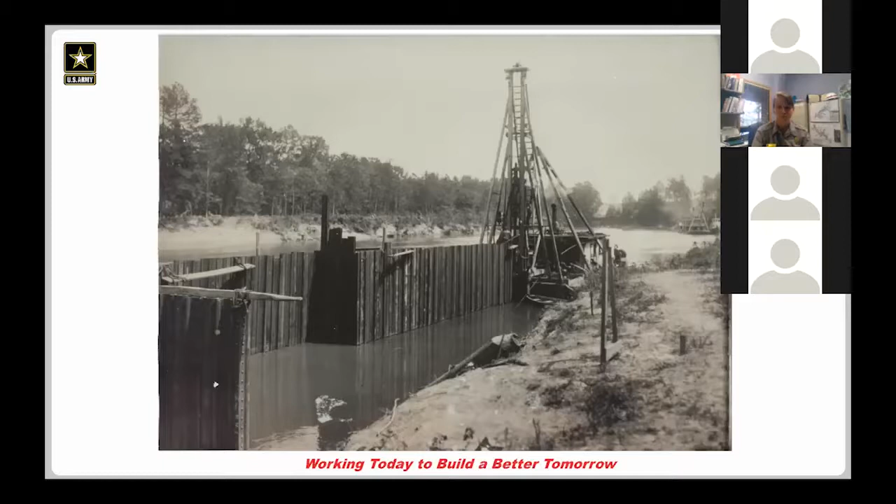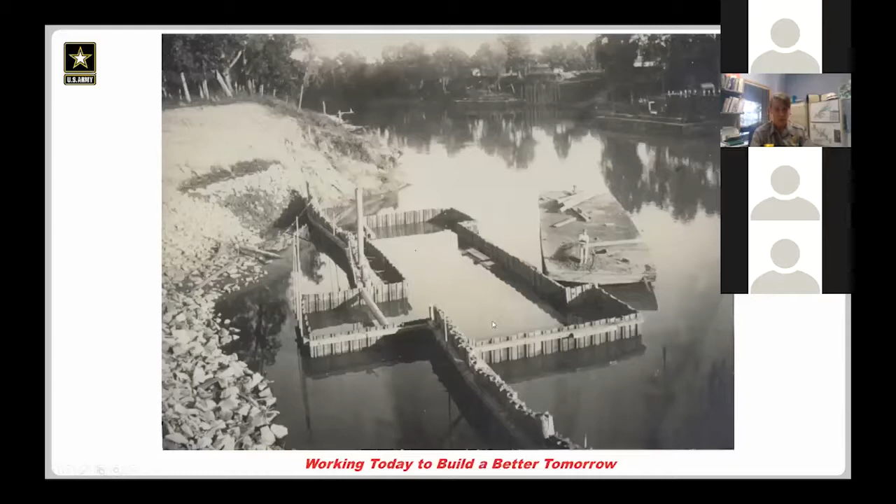This is a successful coffer dam. So as you guys can see, this interior portion, now that it's kind of fenced off with these sheet piles, would be pumped out, and then we would work and pour concrete in the dry in here. So eventually things worked out. This is a completed coffer dam. And once those completed coffer dams are put in, they would pour concrete and continue on with construction.

This is a really, really neat photo, I think. And some of the things I want you guys to take note of here. So this is the interior of our lock chamber. So this is where a boat or barge would be locked through. Typically, this is going to be filled with water. So it's a very unique perspective here, as if we were standing on top of a lock wall. This was actually a little later on; this was not during construction, this was during a modification, but it's a great picture I wanted to show anyway.

And you guys can see there's a person bent over here. So a little bit of scale, a guy standing here. These are what we call our miter gates. There's 4 of them, 2 on either end. And those are what literally swing open and then close to let boats through. At the bottom of each miter gate, there's a series of openings, and they have valve covers on them that flip up and down that are controlled from the top. And those are what we call our fill valves. So that's how we fill or empty the chamber to equalize the pressure.

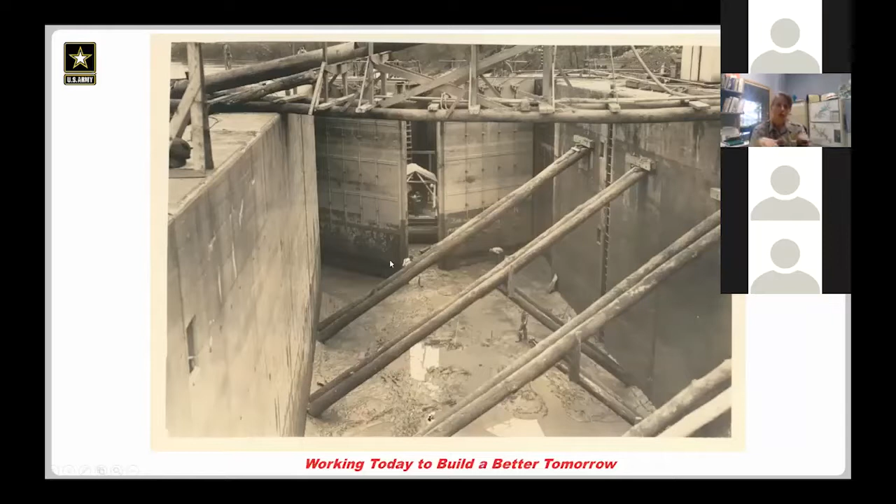So if we want a boat to come in and be locked upstream, we would lower the level of water in the chamber, open those lower gates, let the boat in, shut the lower gates, and then we would open some of these valves at the top end to let the water level rise and fill up to whatever the river height of upstream is. Once that's equalized between upstream and within the chamber, we would open those miter gates up top and let the boat out. Very simple process, really only takes about 30 minutes or so, but just still an engineering marvel to my mind, especially when we consider the time frame that these were built in.

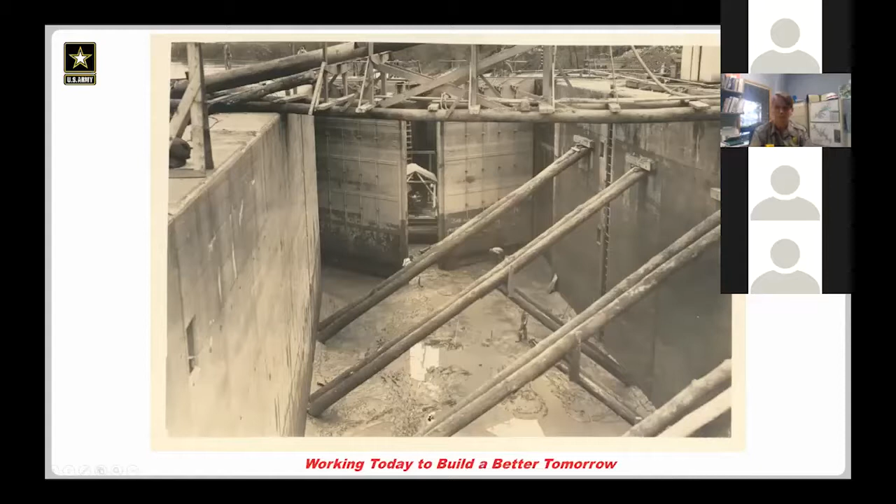Life of a lockmaster was tough. So there were typically 2 on site because you work 12-hour shifts, because lockages happened 24/7, didn't matter the time of day, rain, sleet, snow, kind of like the post office. If a barge is coming upstream, the lockmaster is expected to be there and to lock whatever it is through, whether that be on a beautiful May afternoon with the sun shining or at 2 a.m. in January with it sleeting. Either way. So they lived on site and worked those 12-hour shifts. It was a pretty tough life. They were pretty tough folks.

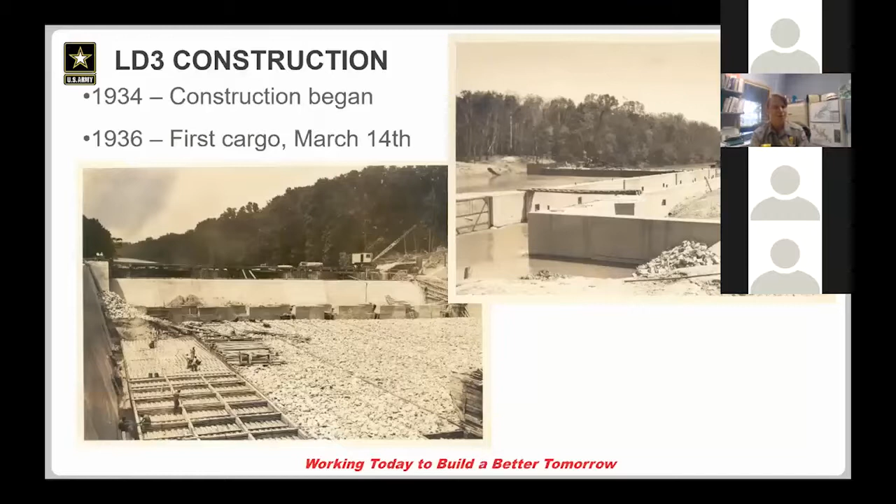There was a party when the barge got up to Lock and Dam 3, and it was led by William O. Huske. And again, that name may sound familiar because Lock and Dam 3 is named after him. He was the president of the Upper Cape Fear River Improvement Association. And apparently he was a pretty squeaky wheel, it sounds like, for the government and for the Wilmington District Corps

of Engineers. As a matter of fact, he was very excited that we put in Lock and Dam 3, but we were not in the clear. I mean, let's be real. Again, the Cape Fear River is a beast to try to get a hold of, and we've been trying to harness it for a long time now. So channel problems continued. We had our 3 locks and dams, but how do you measure success? Commerce was going up and down, but the channel was a nightmare to keep clear, basically.

And from my understanding, Mr. William O. Huske earned quite the reputation as being a squeaky wheel directly to our district commander at the time, letting him know every time there was a problem in the river, and we would jump right on it and do the best we could to clear the snag or where the channel filled in or whatever it was. So still a very tough job for us.

And that is how Mr. Huske, or O. Huske, earned his namesake at Lock and Dam 3. We did decide to name Lock and Dam 3 after him. I believe in the early mid-60s is when that was done. So yes, locks and dams are here. Commerce is moving. We still have channel problems, keeping the channel clear. And we had, I think, maybe unexpected impacts to the fisheries. And so that's what we're going to start to focus on here.

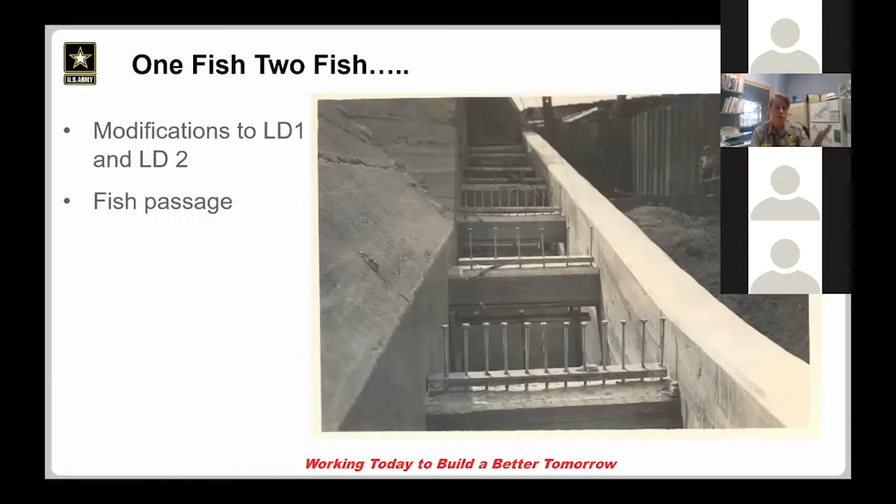So we know we have a struggle with the fishery now. We know we have done a good job with commerce, but we have negatively impacted fish. We've tried these fish ladders to really no success. So fast forward a long way in the future to our fish passage that we have today. So at Lock and Dam 1, this is a picture of Lock and Dam 1 prior to our fish passage coming in. So it's called a rock arch rapids.

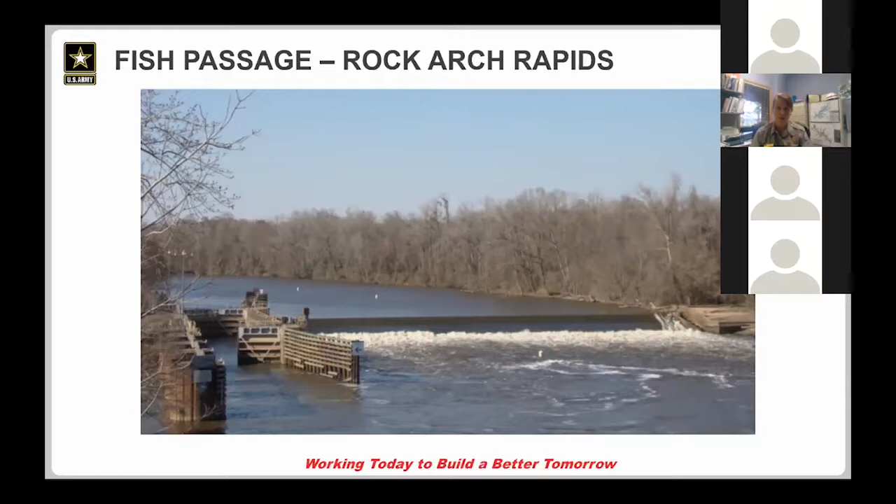And locking fish through, we discovered, is okay. And we've been doing that since, I think, the 70s, maybe even earlier than that, as just a way to get fish upstream. But a ton of partners were involved in the rock arch rapids effort. So basically, let me get to my next slide so we can see. The rock arch rapids were designed and built with a huge amount of stakeholders, a huge amount of partners. As a matter of fact, local, state, federal, nonprofits, far too many to even mention. This work was done in 2012, only at Lock and Dam 1 so far.

This was the first of its kind in the eastern part of the United States, so it was a big deal. And it was designed for shad, striped bass, and hopefully sturgeon, even though they're endangered and not too many of them around, to use and get upstream and essentially get over Lock and Dam 1. The shortnose and Atlantic sturgeon were of specific importance to the federal government because they're a federally endangered species. But we do recognize the importance of the striped bass and certainly the shad for sport fishermen, and the importance to the state.

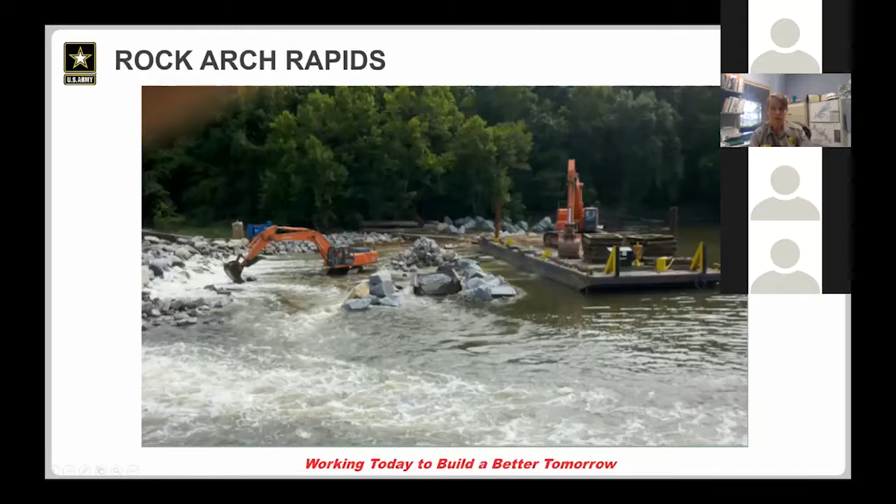So this is an example of a barge that was moved into the river. And literally you can see an excavator in the river moving rocks around to set these in place. I've got a better picture. Here we go. So you can see this is where the rock arch rapids is almost completely done. And they are literal tiers of rocks, almost steps of rocks that provide smaller, shorter pools for fish to rest in. They don't quite have to jump quite so high as they might in the fish ladders themselves.

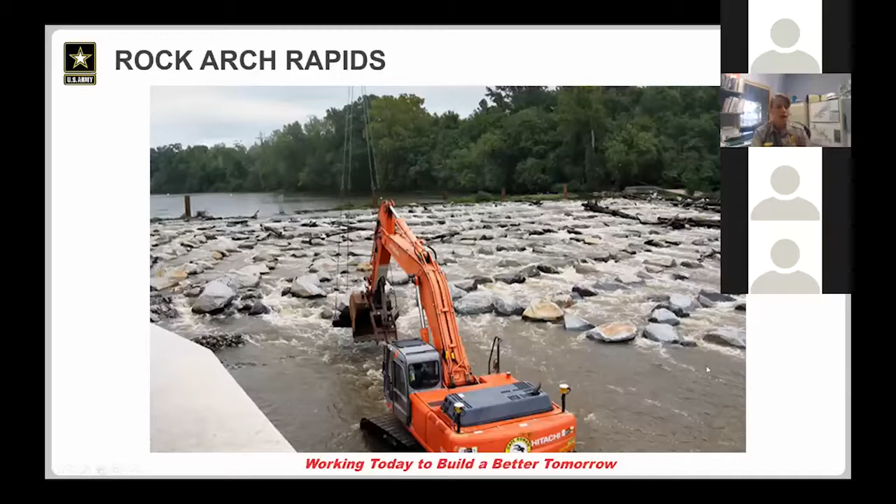You can see this excavator here. The placement of these rocks was so precise that, from my understanding, there was a GPS unit put on the boom on the end of the excavator so that it would pick up a rock and place it in the literal exact location it was supposed to be placed in, so that these were set just so. It was a huge effort, and mostly successful.

So successful for sure for the American shad, not so much for the striped bass. And then we think successful for the sturgeon too, but there's not a lot of sturgeon in the river at this point. So we have caught some, or not we, but state and nonprofits have caught some sturgeon and tagged some sturgeon above Lock and Dam 1. So the assumption is they use the rock arch rapids to go up and over.

So successful, but interestingly enough, the Cape Fear River Watch has secured grant funding to modify this structure to hopefully make it even more successful for our fish, including the stripers. So a lot of lessons learned, I think, in building this, being one of the first on the East Coast.

So there are going to be some adjustments made. So over the next few months, over the summer, we will actually be shutting down public access to Lock and Dam 1 for a little while they come back in. Probably not add a huge amount of stone, but it will be more moving stones around to hopefully make this even more successful. And then maybe even one day, the thought is to be able to add one to number 2 and possibly even one to number 3 as well. We'll see what the future holds for us.

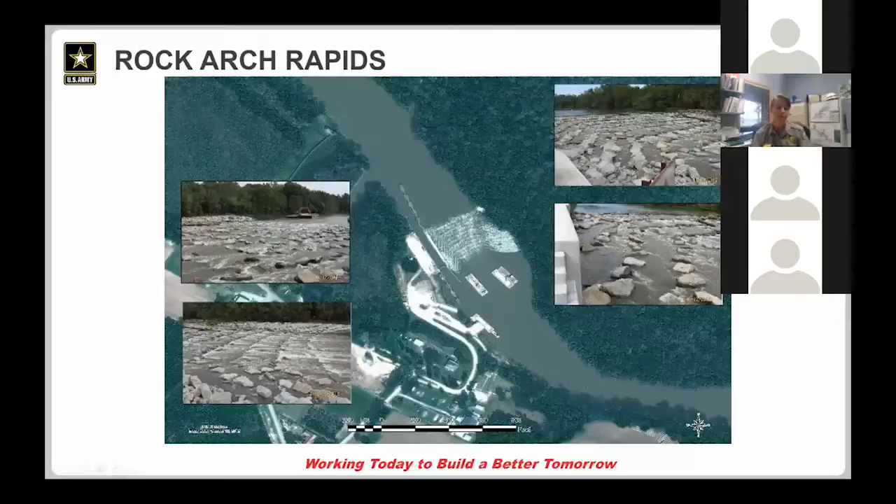We still have challenges with channel depth. Many years ago, when commerce stopped, about 1995, was the last commercial barge that came through. The Corps of Engineers no longer maintains the channel. There's no funding for it, and it's kind of a vicious cycle. There's no commercial traffic. These were put there for commercial traffic and funded for commercial traffic. But if there is none, then you don't get funding for it. And if you don't get funding for it, you can't maintain things, and so you end up in this cycle of our reality now.

Fish passage success, I already talked about. They are going to alter the existing one and possibly add to number 2 and number 3. That's a ways down the road, I think. Aging infrastructure. I started with history. These locks, 2 of them are well over 100 years old. One of them is 80-some years old. They are tough, well-made mechanical marvels. But if you don't use them, like anything mechanical, it starts to break down, and that's where we're at now.

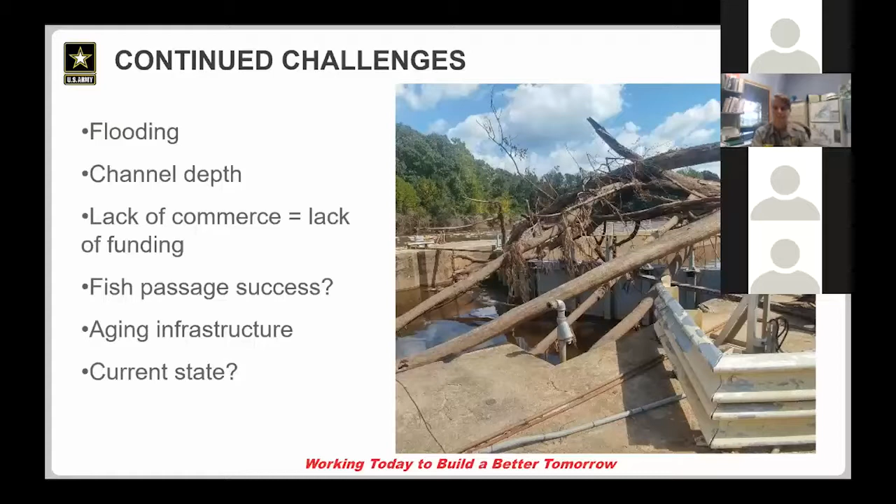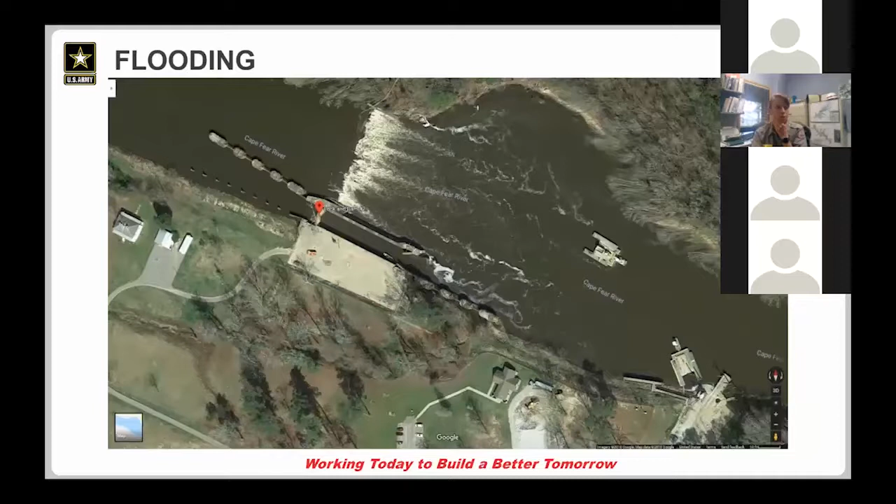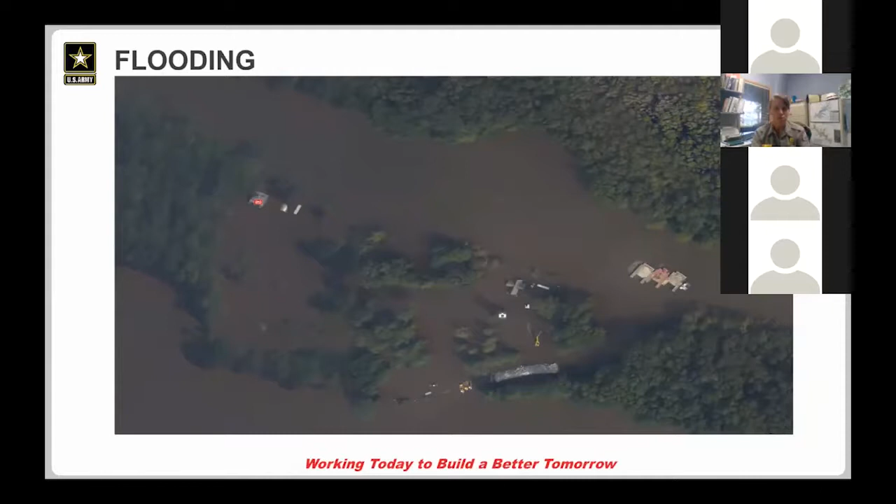This is a really great example of the flooding. This was pre-Hurricane Florence. This is Lock and Dam 2. And then this is what it looked like after Florence. And again, if you guys are local, I don't have to wow you with these pictures. I'm sure you lived your own reality during those times. So our current state's not great. Our past was kind of drama filled. And what about our future?

If you guys have been around for very long, you've probably heard us talk about a disposition study that the Corps of Engineers did. What does that even mean? Well, a disposition study is to determine whether there's federal interest in these pieces of infrastructure anymore. Remember, they were authorized for commercial navigation, and we haven't had that since 1995. So all indications are that there is no federal interest, but where does that leave us? Well, exactly where we are right now. Congress has to make that decision that there is no federal interest and we need to dispose of them. But we need to have a willing entity to take them if all those decisions line up and fall into place. So that's a big question mark for us.

We're kind of in this limbo now. We have just enough funding to pay our 2 employees that do the best they can to maintain the grounds, keep the place clean, do minor repairs as best we can, but we don't have enough money to get these locks to where they used to be. And if there's no need for them, maybe that's okay.

Maybe it's not. That's for you guys to decide, honestly. So definitely kind of in a weird spot. And I hated, when I created this program, I hated leaving this here because it seems like such a Debbie Downer moment. And I don't mean it to be. My folks who work at Locks and Dams do amazing work and do the best they can with what we give them to work with, and are dedicated to these.